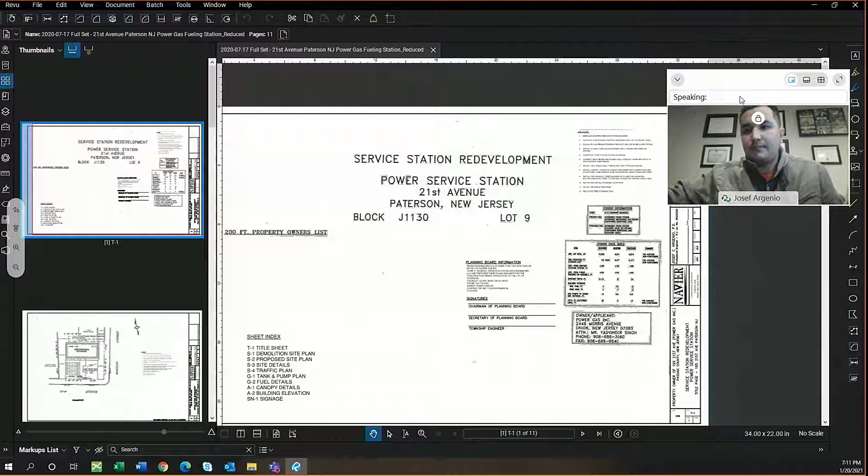Sure. This is the title page, which was talked about by the planning official, showing the zoning data tables, the owner applicant, and the planning board information, as well as a job scope, which was detailed previously by the zoning official, Mr. Michael Deutsch.

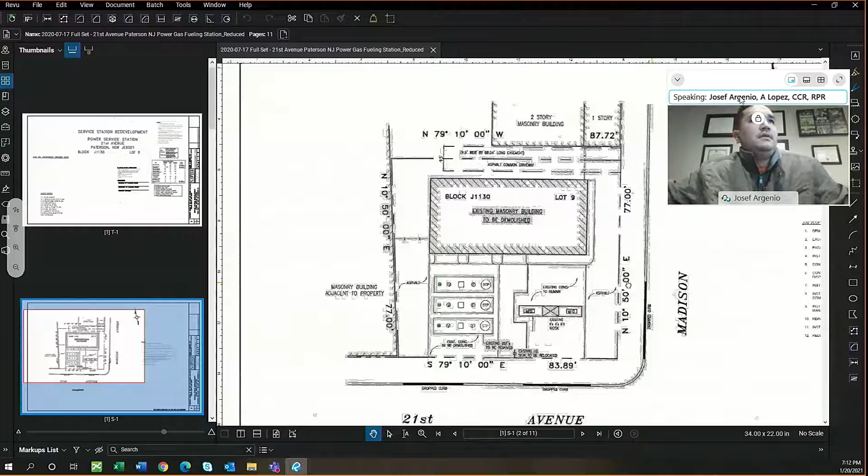This is for 195 21st Avenue in Paterson, New Jersey. The next page, S1, is an existing conditions plan, showing the existing masonry building to be demolished, along with the existing pumps, kiosk, and gasoline tanks on site. This is mainly an existing conditions plan and a demolition site plan, showing that the building, pumps, and tanks will be removed from the site.

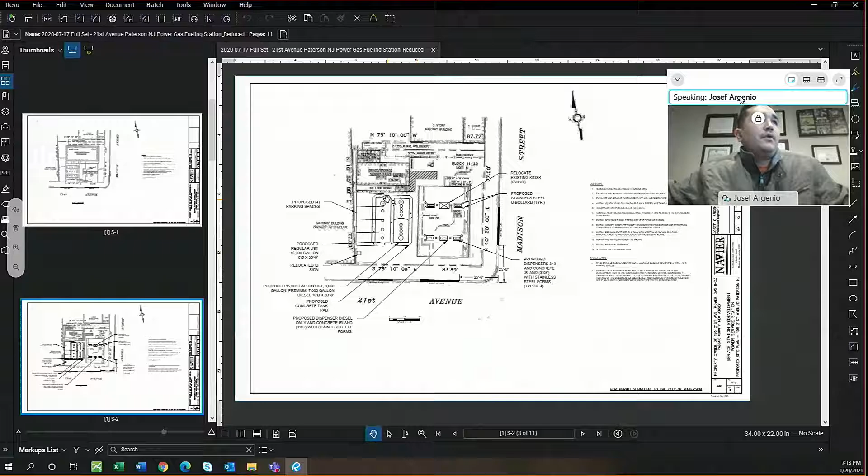The second page, S2, is the proposed site plan, which shows two new gasoline tanks: one proposed at 15,000 gallons, and the second is a split tank of 8,000 and 7,000 gallons. The proposed 15,000 gallon tank is for regular fuel, a 10-foot diameter by 30 feet in length tank. The split tank is also 15,000 gallons total, split between 8 and 7, also 10 feet in diameter, 30 feet in length, with a proposed concrete tank pad in the vicinity of where the existing tanks were located.

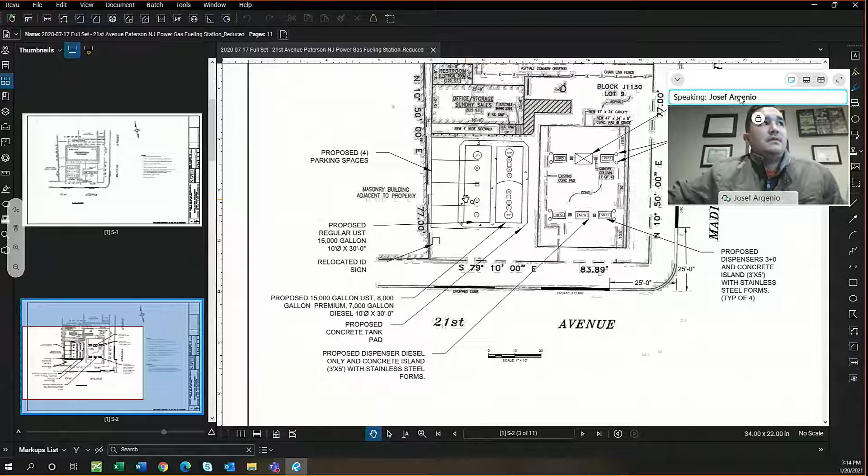I know there was some comment about the tanks being close to the adjacent property. If you look at the previous plan, the existing tanks were even closer to the property, so this change in tank location places the proposed tanks farther away from the adjacent property.

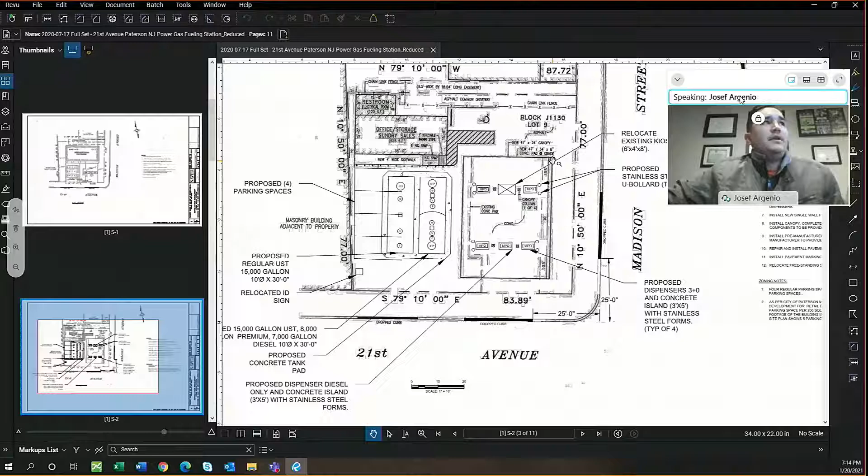This plan also shows the 5 gasoline pumps and a relocated kiosk with stainless steel U-bollards at the site. In addition, the office building and restroom, as stated previously, is shown on this site, with the new canopy being 47 feet by 34 feet. The job scope and zoning notes are also included for clarification on this plan.

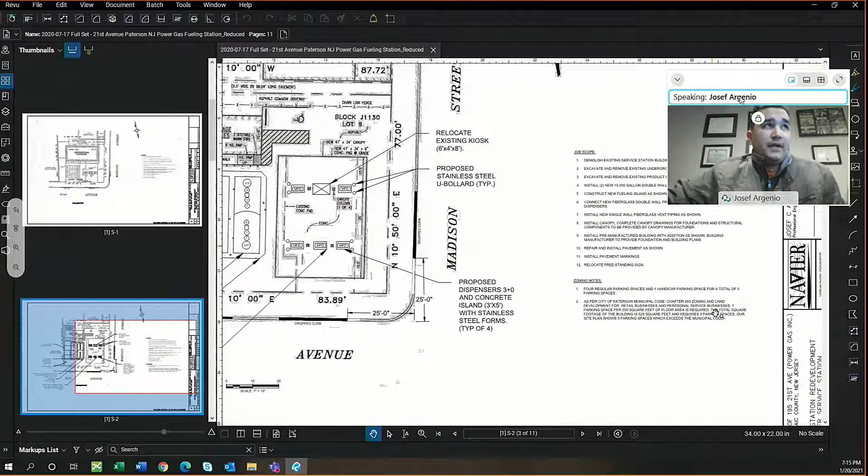The overall job scope, in brief summary, is to demolish the existing service station building, excavate and remove existing underground fuel storage tanks, as well as the product and vapor recovery piping, and install new double wall fiberglass tanks. Additionally, constructing new fuel islands and pumps, connecting those pumps to the gasoline tanks through a fiberglass double wall product line, and installing new single wall fiberglass vent piping as shown.

Additionally, I brought up the canopy site plan and location. A pre-manufactured building was shown on future plans, which I'll get to, showing the architecture of that building. Some additional minor items are to repair and install pavement markings, and the freestanding sign, which we'll also get to in the next couple pages.

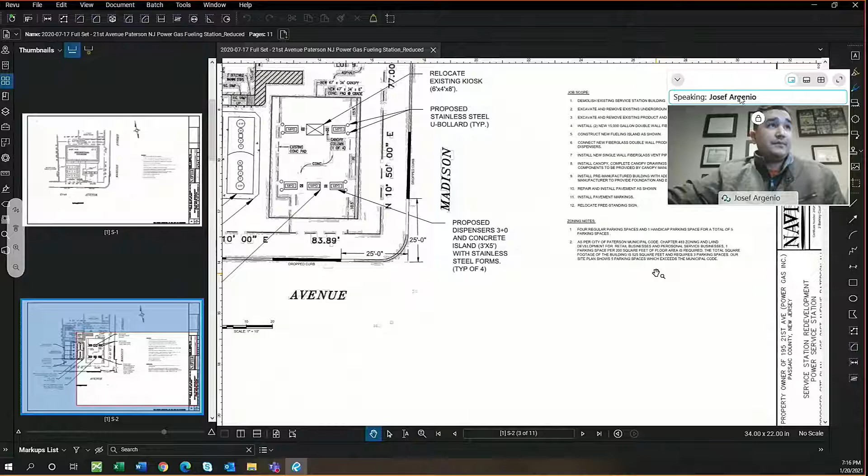The zoning notes, as referred to previously, include 4 regular parking spaces and 1 handicap parking space, and all construction is to be per building code and City of Paterson municipal code.

Moving on to the site details here.

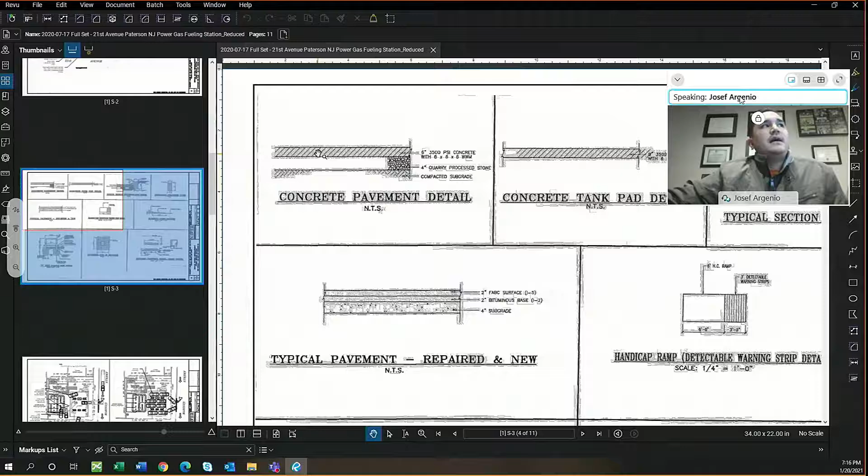There is a concrete pavement detail. The concrete pavement is going to be 5 inches thick at 3,500 PSI concrete with 6x6 wire mesh, placed on top of 4 inches of quarry processed stone and compacted subgrade. That's just the concrete pavement detail.

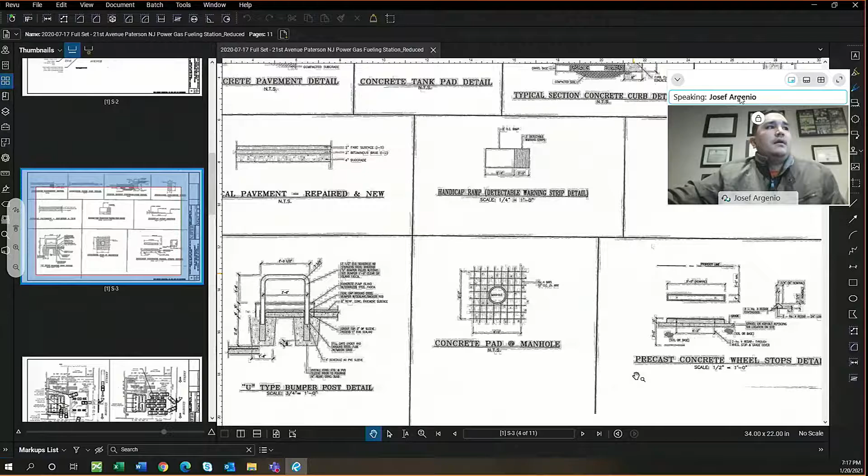There is also the concrete pad detail, showing similar thickness and strength of concrete, as well as handicap details as per ADA requirements, U-bollards, and all site-specific details for the site.

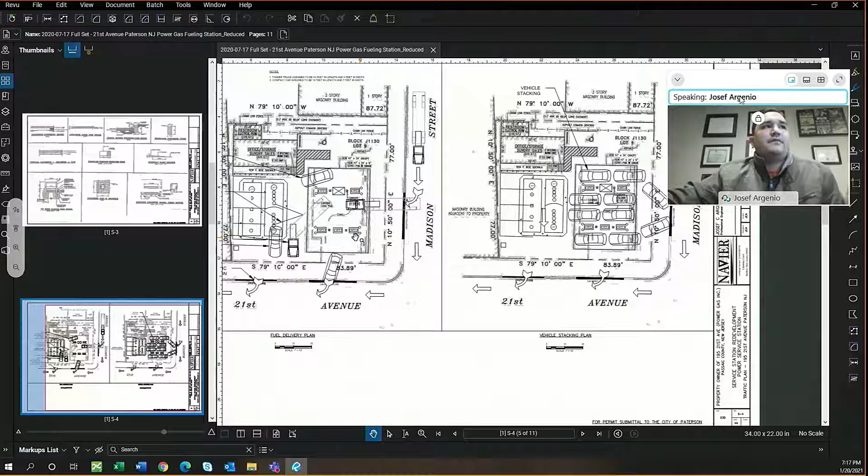The next plan is the traffic plan. I don't know if we wanted to bring in Mr. Korak for some analysis here, as he's more of a specialist in the fueling, access, and vehicle stacking. He'll be able to cover those issues for sure, so if there's any part of the site plan you'd like to defer to him, we can do that, not a problem.

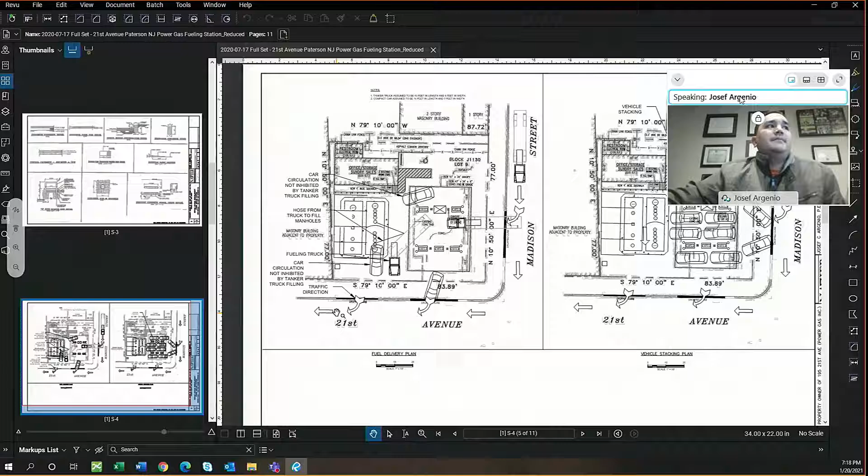As stated previously, the tanker truck is going to be coming down Madison Street and turning into the site, stopping at this location and fueling into the new tanks. This route allows traffic not to be inhibited on the site, and allows the fueling tanker truck to access the site in a good flow pattern, without inhibiting customers that are either fueling or visiting the retail store.

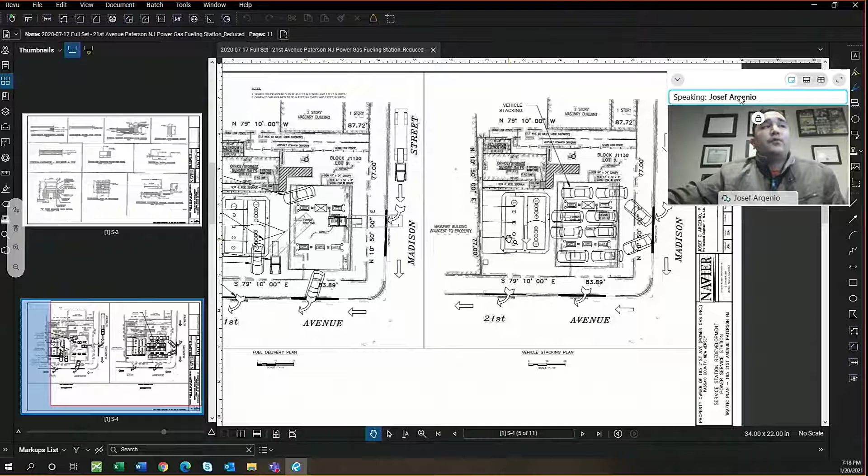The vehicle stacking shown here represents the most possible vehicles that can be stacked at the station at one time. This was generated to show the full capacity of vehicles that could be on the site.

Going into the next plan, the G1 tank and pump plan. This shows a pipe trench and dispenser connection detail, showing a cross section of the dispensers and how they are connected into the piping underground. This flexible fiberglass double wall piping is then connected into the new gasoline tanks.

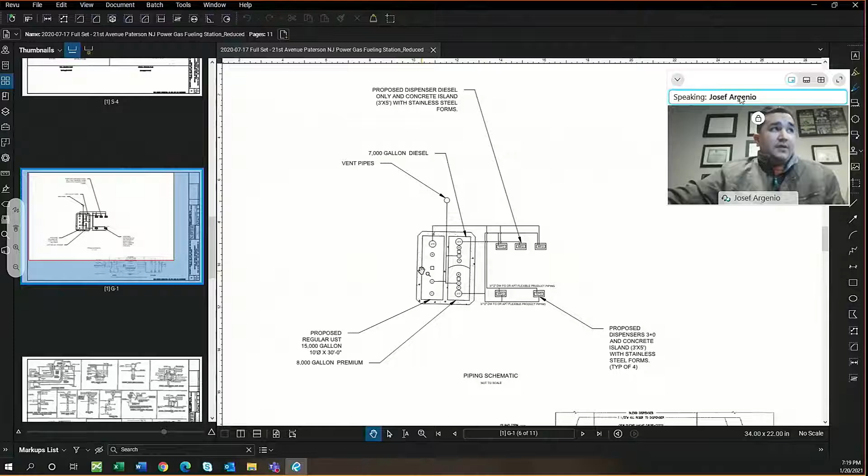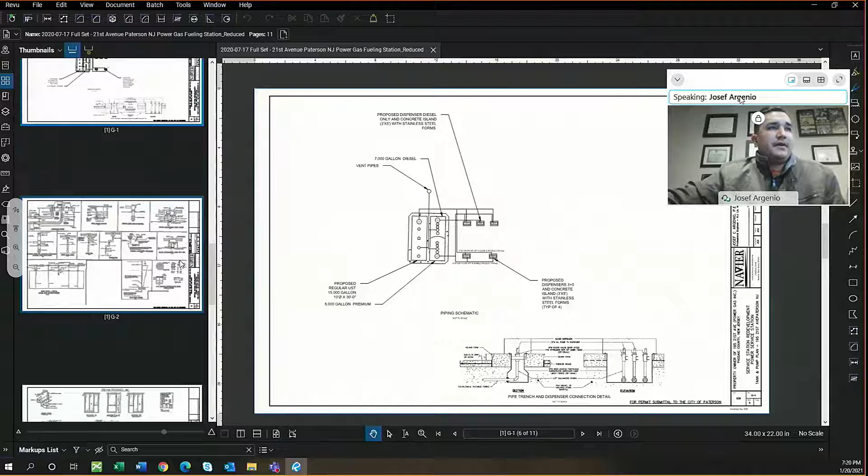This schematic is shown here and shows not only the piping from the pumps into the tank, but also the vent piping that comes out from the tanks. This vent piping is needed to alleviate pressure from the tanks, from the vapors occurring in the tanks, which is then discharged to atmosphere as per normal API standards and normal operation of a fueling station.

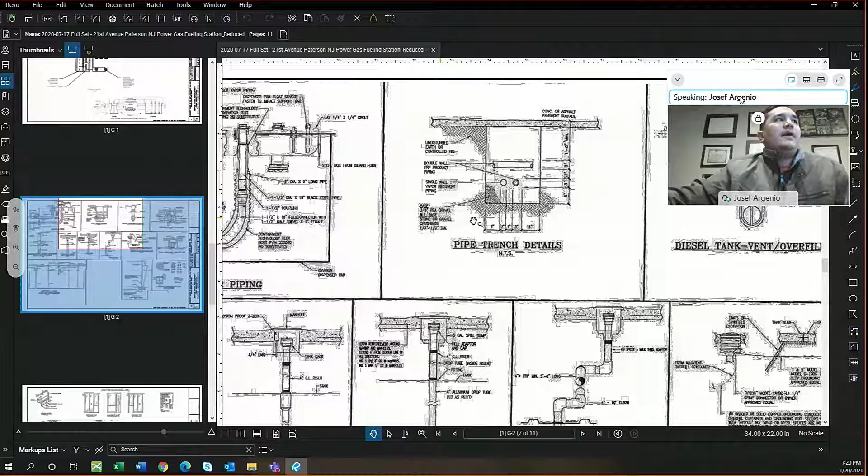The next plan shows even more specific details to the fueling operation. Not only does it show dispenser piping, there are also pipe trench details, showing the double wall product piping and the single wall vapor recovery piping in undisturbed earth, and the depths that the piping should be installed. It shows pea gravel and a stone base and gravel to be compacted for the pipe trench. There's also a containment sump.

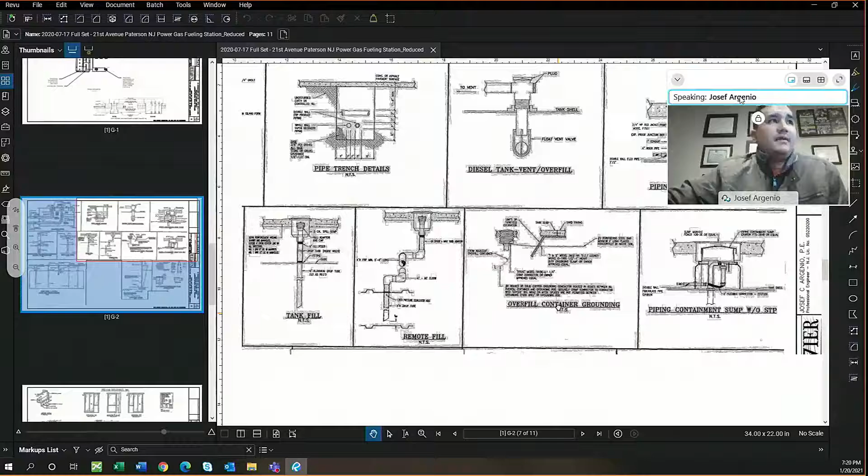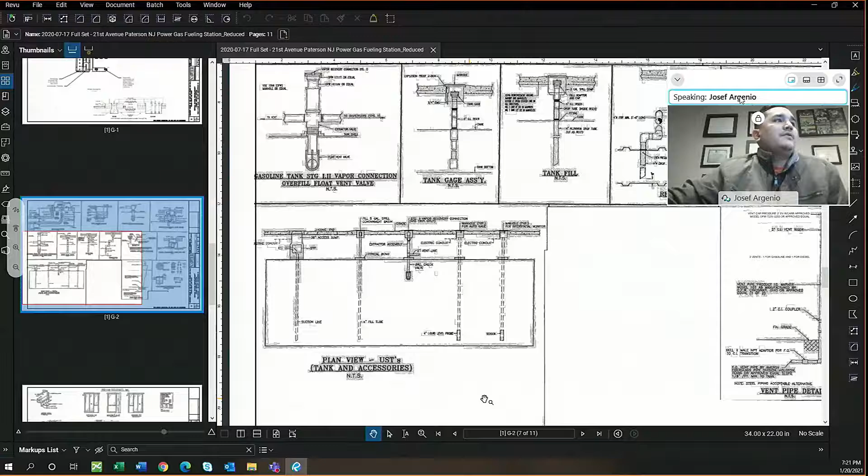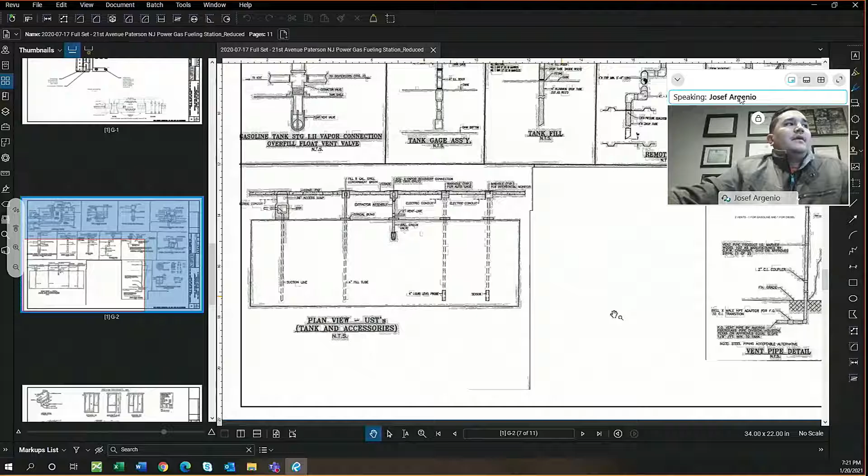This sump containment is a manhole that goes around the piping underneath the dispenser pumps as a measure to contain the fueling. Additionally, there is overfill container grounding, remote fills and tank fills, tank gauge assemblies that will monitor gasoline levels in the tank, the vapor connection, overfill float vent valve, and a view of the tanks and all the components that go into the fueling tank, such as the fill, the vapor recovery, and the manholes with liquid level probes set at a certain height in order to know the level of the tank and how much needs to be pumped out and refueled.

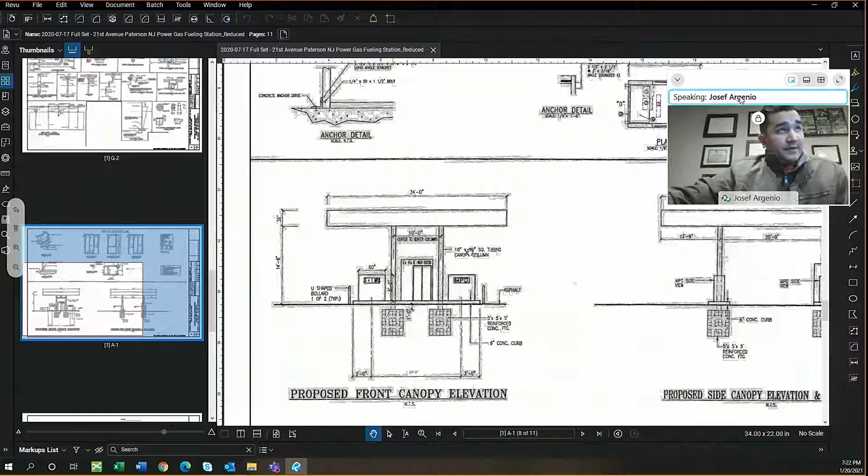The next plan, A1, shows the proposed front canopy elevation. This canopy is 14 feet 6 inches in height. It also shows the canopy being above the fuel pumps, with U-shaped bollards around the pumps to protect it from traffic. The center columns are 10 feet apart, center to center.

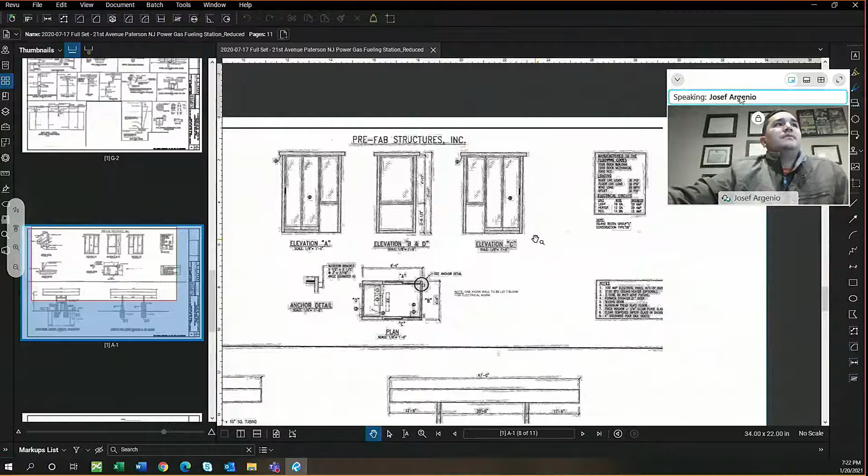There are additional canopy elevation views showing the canopy being 47 feet in length. Additional details show anchorage of the doors and elevations of the doors to be installed on the building, as well as roof live loads, floor live loads, and wind loads of the building, along with electrical circuits that will be installed for the building.

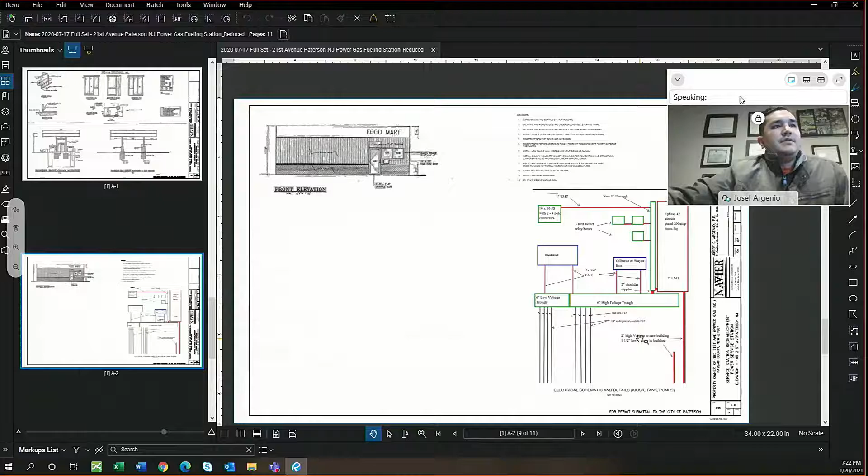The next page is A2, which shows an elevation view of the building. There is vinyl vertical siding and a brick veneer. The building is 13 feet in height, and it shows a door and 2 windows.

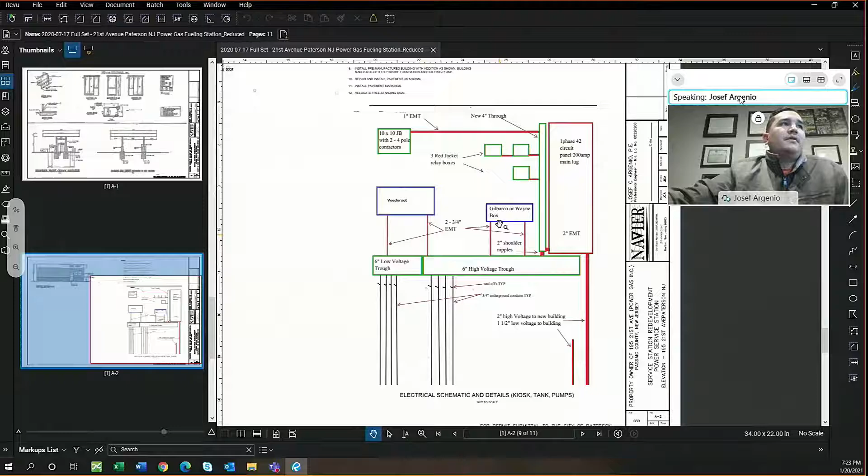This schematic here is an instrumentation schematic for electrical instrumentation for the kiosk tanks and the pumps. There is a low voltage trough and a high voltage trough, which connects electrically to the Veeder-Root, which monitors tank level in the gasoline tanks. Also connected to the trough are the Gilbarco or Wayne dispensers - those are the pumps.

The following page, A3, shows SN1, the existing ID sign detail that will be installed on the site, and it also shows the canopy elevation and the logo that will be installed on the site, as well as the ADA parking sign.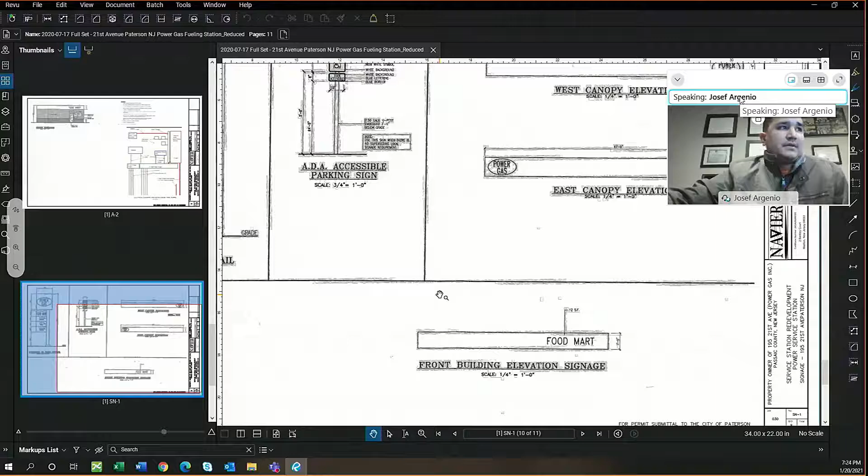The next page is the lighting plan, SN2, again showing the two different types of lights that will be installed at the site.

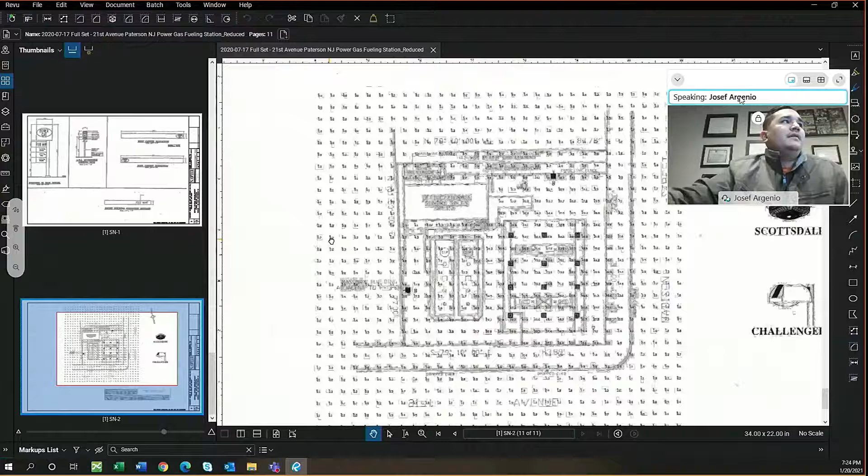These numbers here and this grid is a foot candle analysis that shows that almost all of the light will be on the site, and it dissipates as it moves away from the site. So a value of 49.2 foot candles can be shown in the middle of the site, and as it dissipates away, it's only at 0.2, 0.1 foot candles. So these lights are shown here on this grid pattern to only be focused on the site and the center of the site, and it dissipates as it leaves the site.

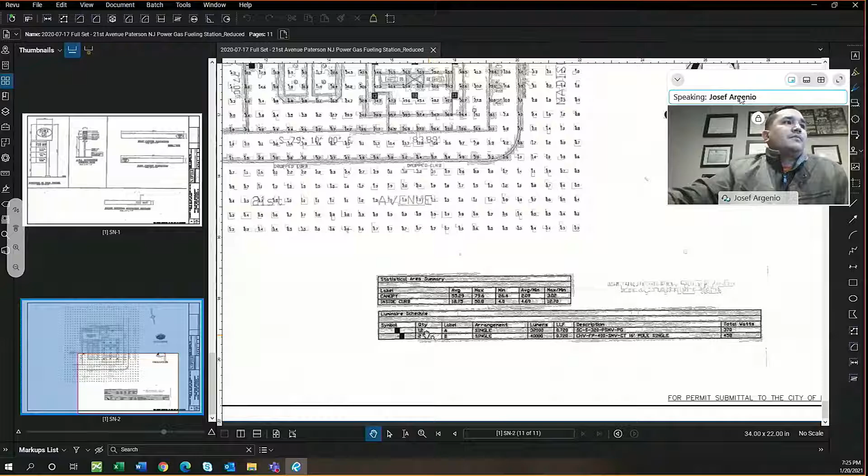And then there's an additional table here that shows this analysis and the quantity of lights that are going to be installed. So there's 12 of the Scottsdale and 2 of the Challenger.

And that concludes the plans here that I'm sharing on the screen. If there's any questions, again, just direct them to myself, Mr. Mariconda, and Mr. Korak.

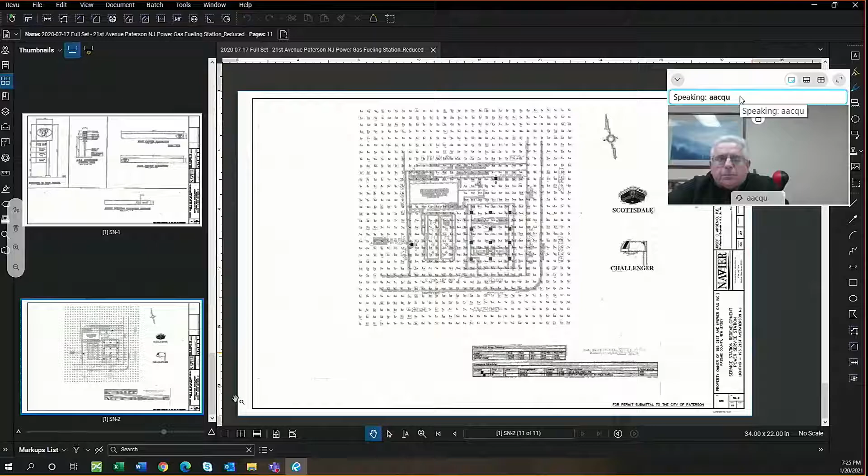Mr. Argenio, you've obviously had an opportunity to review Mr. Deutsch's report, and I know you touched on some of the issues, some will be covered by Mr. Korak. Is there anything else that you wanted to specifically reference in terms of his comments and planning review, or do you feel you've covered all the issues that pertain to your testimony?

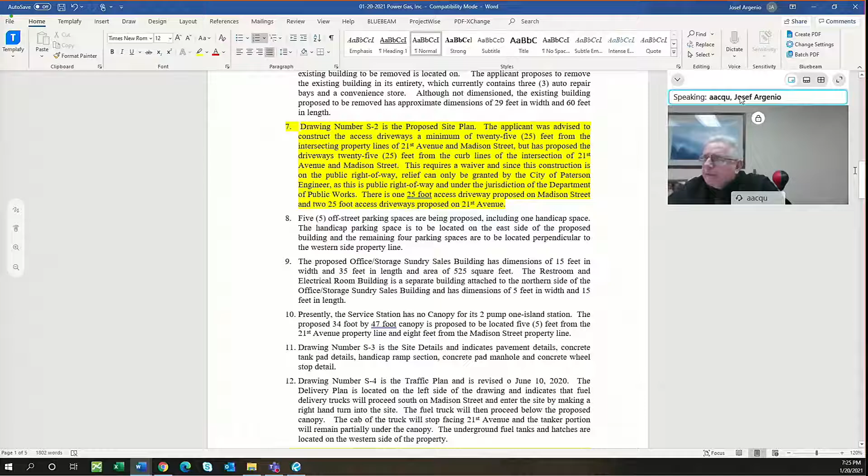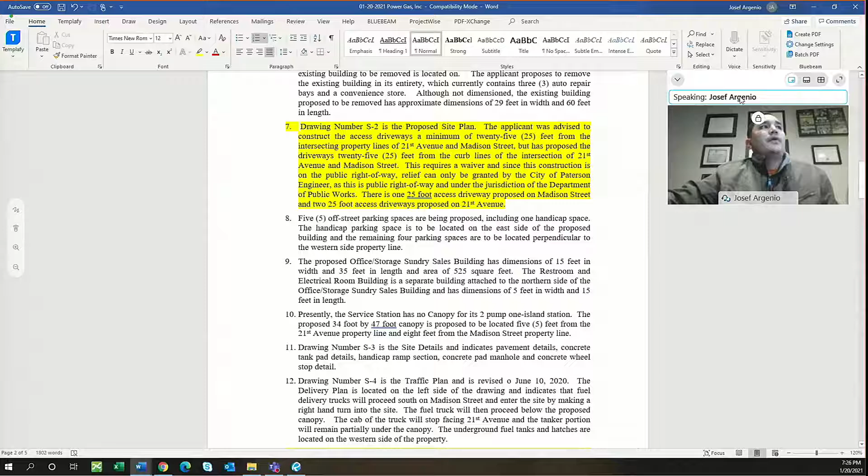One of the items I wanted to address was item number 7, where it says drawing S2 is the proposed site plan. We did show the driveway access to be 25 feet from the curb lines, and we are requiring a waiver from the City of Paterson in order to do so. I don't feel this deviates tremendously from the 25 feet from the intersecting property lines of 21st Avenue and Madison Street. That's just something I wanted to point out - there's not much of a deviation, and having those curb cuts at the locations we show allows for better traffic flow, which is why we were asking for a waiver.

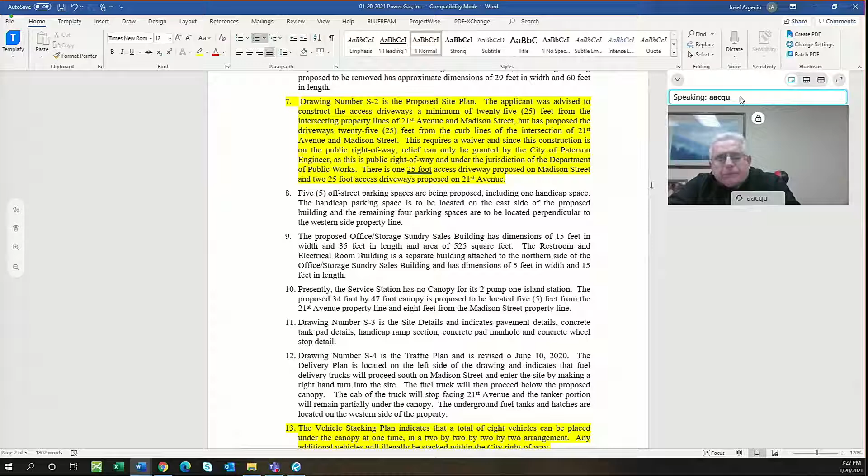Understood, and so that would be an issue the city engineer would address, perhaps at a point after approval, if you were to be granted approval. And in your estimation, is this a functional setup similar to other ones you've constructed in the past? That is correct, yes.

Anything else from Mr. Deutsch's report? How about number 24 regarding the tanks, the variance regarding tanks being closer than the minimum 35 feet to the adjacent property line?

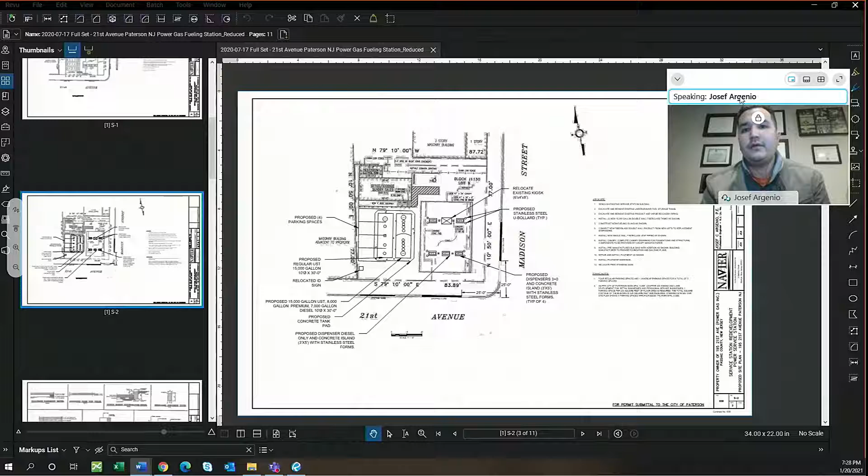Thanks, Mr. Maricondo. Yeah, I touched on that previously. The existing tanks are closer than what we were proposing. The existing tanks are almost up against the property line, so we are moving the new tanks 20 to 25 feet away from the adjacent property line. I know there is a variance being requested - in order to make the site work, we are requesting a variance. We hope it's granted and approved, and we are doing our best to adhere to those requirements. We knew those requirements, and we moved the proposed tank away from that adjacent property line.

So your diligence was that this is a substantially better location than previously existing? That is correct, yes. All right, would that conclude any other comments you would have at this time, subject to questions? Yeah, that concludes all my comments, subject to questions, yes.

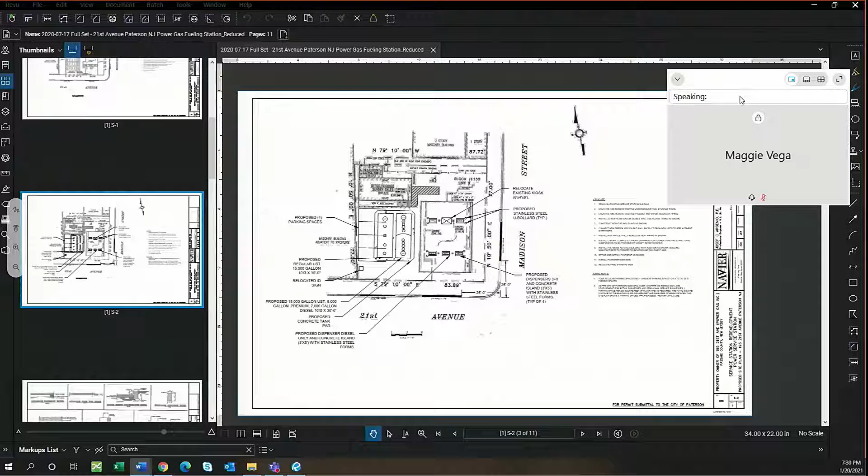Thank you, Madam Secretary. At this time, I'm going to open up to the commissioners. Commissioners, any questions of Mr. Argenio?

And on that, this is me. Traffic, but how long... is the public not going to... this is the public right of way, so I'm wondering how long the construction is going to take, because traffic over there is complicated, and I'm wondering how the public is going to have access there.

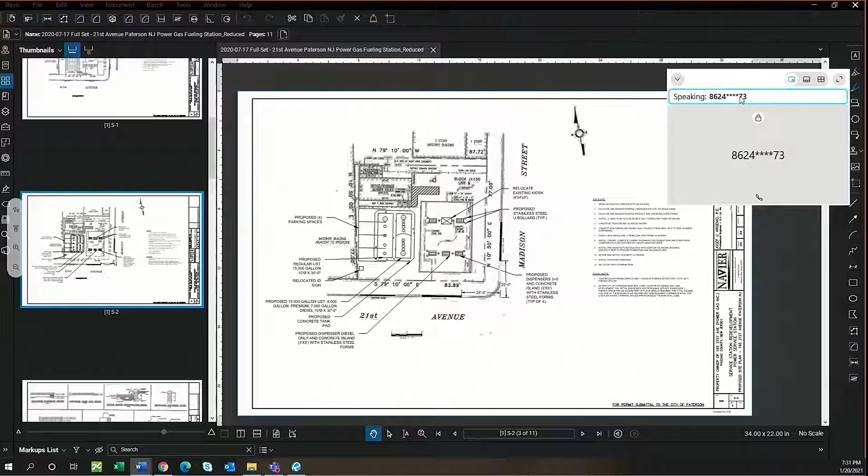Mr. Argenio, if you're able to answer that - I don't know how far you're involved yourself in the construction phase, but maybe you can give us a timeframe or a projection of how it could be done.

Sure, yeah, I think our construction contractors are also on the phone, so maybe they can add to it. But typically, if you're replacing sidewalk or a curb, it should only take one day, and that would be to jackhammer out the curb and then pour the curb, the depressed curb, at a new grade.

But what happens is that the concrete needs at least 7 days to cure before it is driven over. So at that time, the depressed curbs could not be used, and there would be cones or coverings over them for 7 days in order for the concrete to cure. But just the construction time to do a curb and pour it would only take about 1 day.

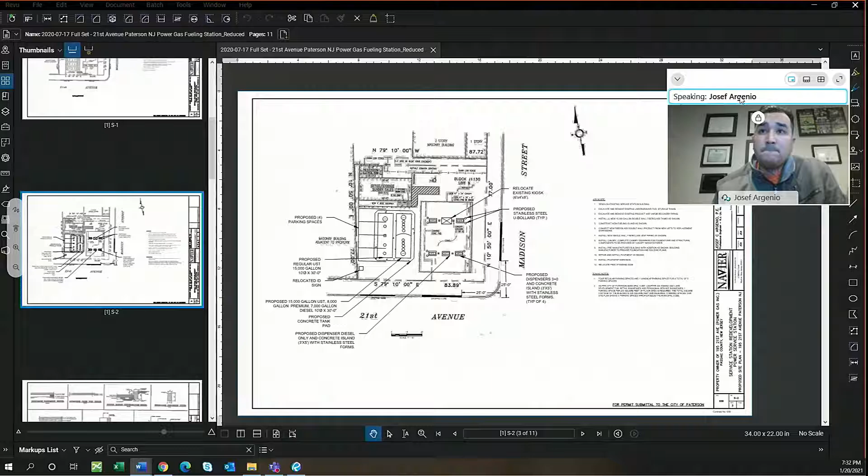And of course, there would be on-site construction as well. Correct. Commissioner Santana, anything else? No, I don't have any more questions. Thank you. Okay, all right, any other commissioners?

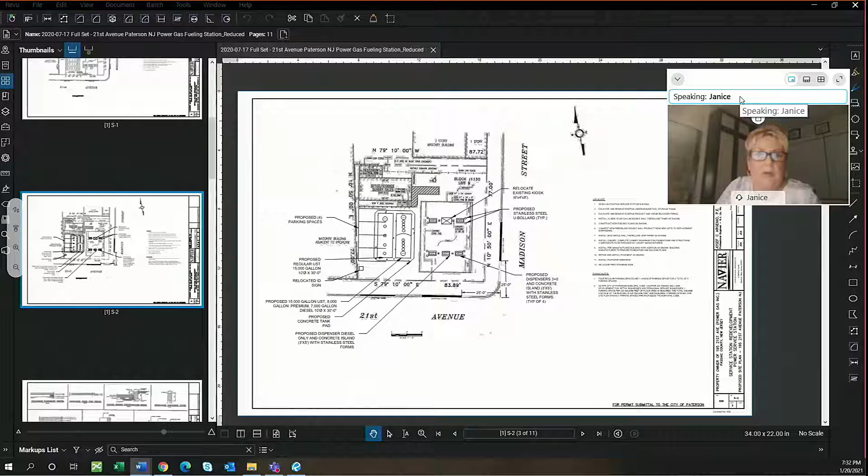Okay, hearing none. Okay, Mr. Maricondo, please call your next witness. Yes, thank you, I'll go to Ken Sherman of Stonefield Engineering.

Okay, hi, good evening. Raise your right hand. Do you swear or affirm the testimony you're about to give is the truth, the whole truth, and nothing but the truth? I do.

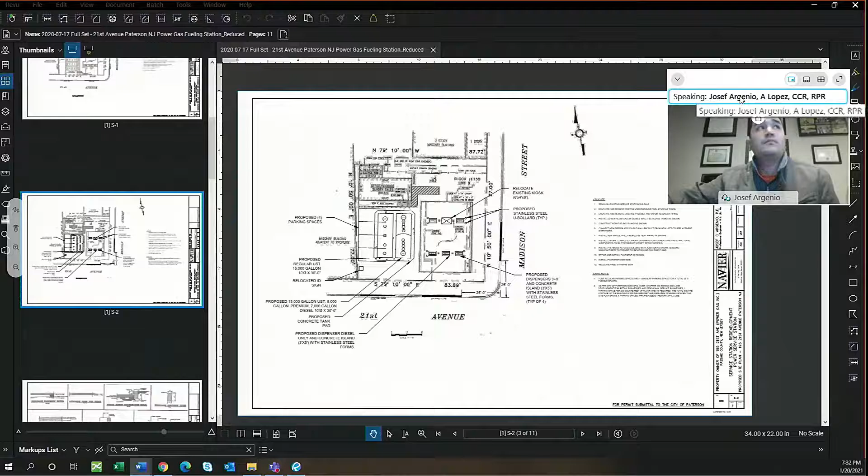Can the plans be taken down if you're not going over them? Sure, I'm sorry, yeah, we can remove those. John, do you need to refer to them at all? I think I'll share them myself from my own desktop.

Okay, I got it. So just while that's being done, for the record, state your professional background. I know you've appeared before this board numerous times. Certainly, I'm a licensed professional engineer in the state of New Jersey, with a Bachelor of Science in Civil Engineering from the College of New Jersey, expert in the field of traffic transportation engineering, having prepared over 100 traffic studies for land development applications.

That's correct. And pursuant to that review, you had an opportunity to review the site and interact with the applicant and the site engineer, is that right? That's correct. And based upon that, you did an analysis of the site as it relates to the modifications being proposed and the impact on the surrounding area in terms of flow of traffic in and out. Yes.

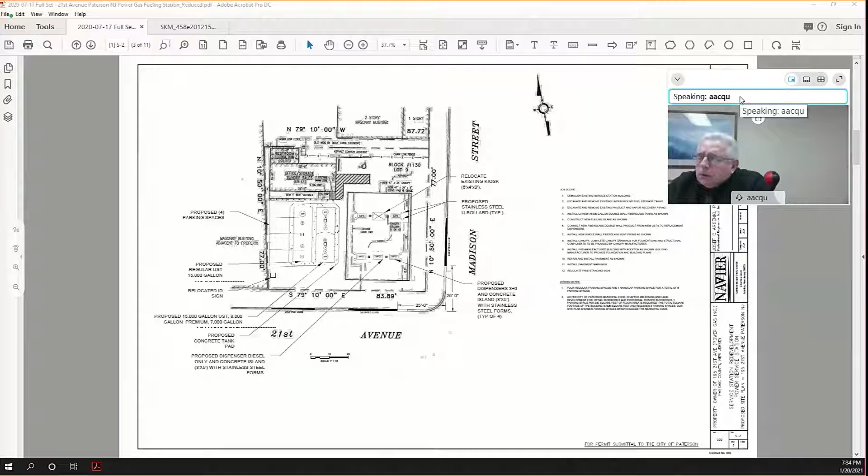Okay, could you give us the benefit of that analysis? Certainly. As part of this analysis, we first start our review by looking at the existing site, the existing conditions of the fronting roadway network, and I'll pull up sheet 2, which is the existing conditions plan of the site plan set. So the site's located at the northwest quadrant of 21st Avenue and Madison Street.

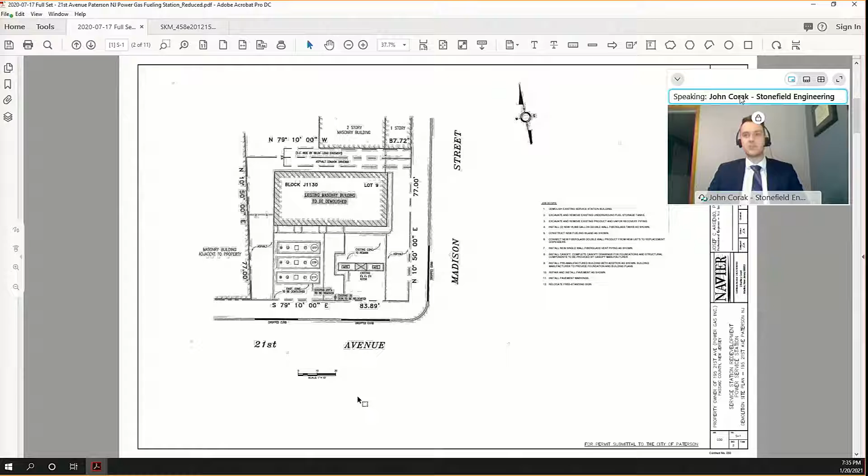21st Avenue is a well-traveled roadway in Paterson, especially in the stretch here that's between Straight Street - a name I can never say correctly - and Beckwith, where you get good two-way traffic flow that helps get traffic to and from Interstate 80. In the vicinity of the site, 21st Avenue has on-street parking on both sides of the road. There are a number of properties with driveways, turning maneuvers, and of course a number of cross streets like Madison Street where there are turning maneuvers as well.

So there's quite a bit of activity here, but it's all what I would consider to be at more city speeds. It's city driving conditions really at its heart. Madison Street is a one-way roadway headed south toward 21st Avenue, so you could turn from Madison Street onto 21st, but you can't turn from 21st onto Madison. Madison Street also provides parking along both sides, but it's important to note that in the existing condition today, there is no parking permitted along either frontage, just based on the location of the intersection and the driveways as they currently exist. It doesn't permit on-street parking along that frontage.

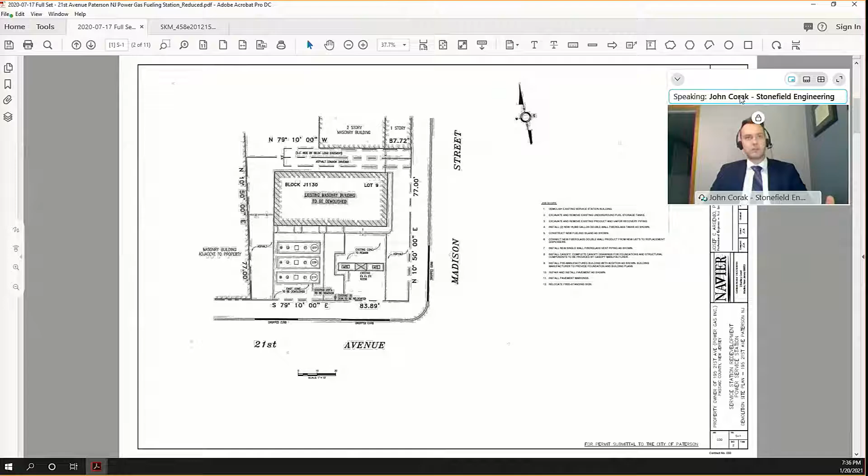The existing use itself is the service station with 3 service bays, a small convenience shop, and 2 gas pumps. That's 4 fueling positions. They can fit 1 car on either side of the pump, without a canopy. This is what I like to consider your classic city gasoline station with the service bays, the small C-store, on a corner lot of a well-traveled roadway.

In my experience doing numerous of these gas station projects, what we're seeing is that the industry's pivoting away from these service bays. One of the biggest reasons is that new cars just don't break down nearly as much as older vehicles did. This site dates back to the 1950s, and auto repairs were certainly more common back then than they are now. The breakdowns that do happen tend to be a little more complicated, and people tend to use auto dealerships instead of these gasoline service areas. For typical maintenance items—brakes, mufflers, oil changes—there are more specialty locations, like Pep Boys, Meineke, Firestone, that are used more frequently now than the classic service bay at a gasoline station.

Usually, in my experience with these types of developments where we're switching service bays into a newer use, a redevelopment of the site, we've seen a lot of service bay conversion to convenience store. That's not the case here. What we're proposing is roughly the same size convenience store as previous, at 525 square feet, but instead an expansion to the gasoline fueling canopy, as shown on page 3 of the site plan, to provide 4 pumps or 8 vehicle fueling positions for the site. What this does is, instead of generating additional traffic to the C-store use, it's simply providing additional fueling areas for gasoline use. The fuel use itself doesn't generate more traffic based on the number of pumps that are there.

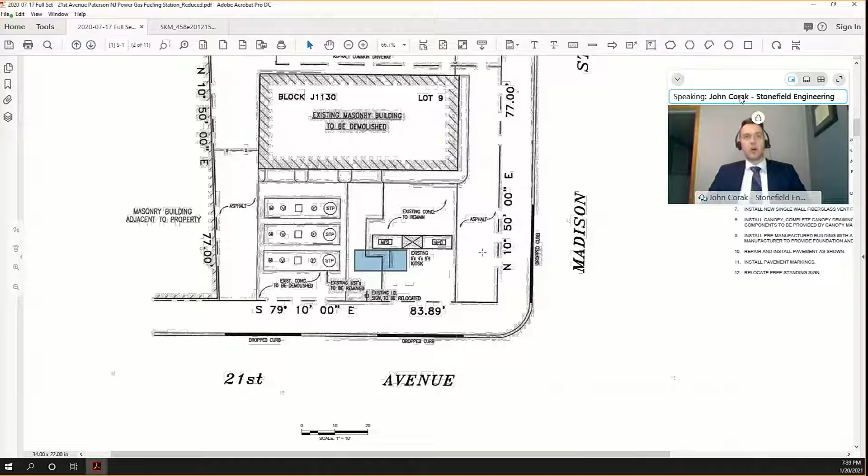It provides a vehicle who comes in off of 21st Avenue the ability to find a fueling position that aligns their car with the gas nozzle of the pump, so the vehicle doesn't need to recirculate or do a 180-degree turn on the site. Whereas in the existing condition, if you come in on 21st Avenue and there's a vehicle in that first spot, you'll usually need to turn all the way around to the other side to get to the fueling position you need. The new configuration allows for more vehicle fueling positions without an increase in traffic.

To give the board an idea of what kind of traffic we expect for the site, we conducted a trip generation analysis using the Institute of Transportation Engineers Trip Generation Manual, an industry standard for forecasting traffic from developments. There are a number of gasoline station and convenience store type uses in the manual that are ultimately related to the size of the convenience store for forecasting trip generation by the site. So really, an expansion to the fueling positions, the data suggests, isn't going to increase traffic—it's about the expansion to the C-store.

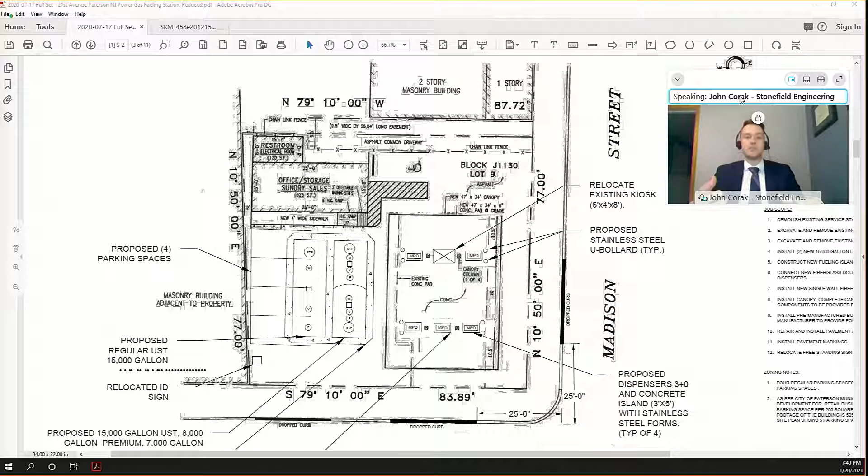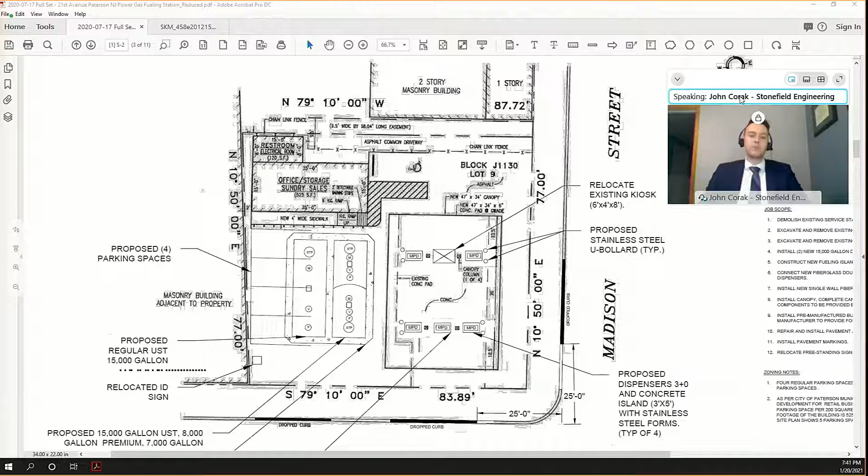The convenience store here is very small, 525 square feet. The highway convenience stores—QuickCheks, Wawa's, even some 7-Elevens—are 10 times the size of this store, so the offerings there are much more expanded than the offerings could ever be here. This is a store meant to serve the local community. It's what's desired per the redevelopment plan, not to have those big businesses, but a small community business where you can pop in quickly, get a convenience item of need—it's not a long-term destination. I know at QuickChek and Wawa's, people go there for lunch and sit in the parking lot for 45 minutes using their lunch hour away from the office. This is not that kind of use—it's a pretty quick turnover type of use.

Getting into the actual trip generation numbers, I should touch upon those, I apologize for glossing over it. Those ITE numbers suggest that over the course of a peak hour of traffic, there would be 26 trips generated by the site, in and out combined, so that's about 13 vehicles. That's a relatively low number to access this site, and that's consistent with what we've seen at other non-highway gasoline stations with a limited convenience offering.

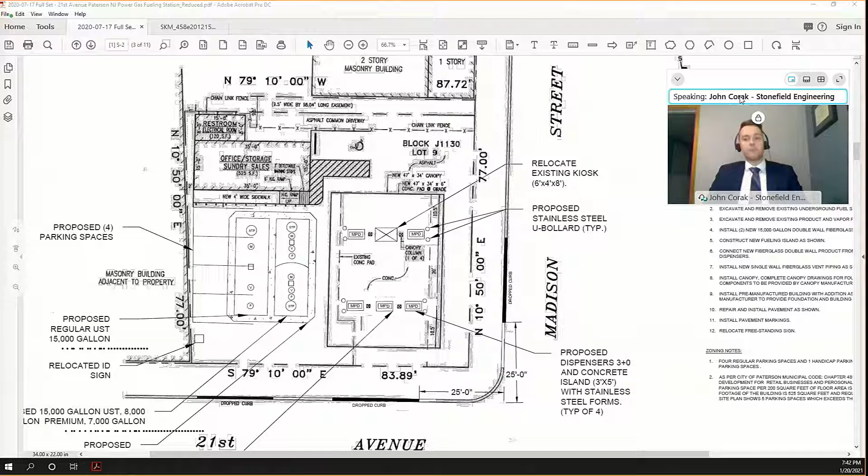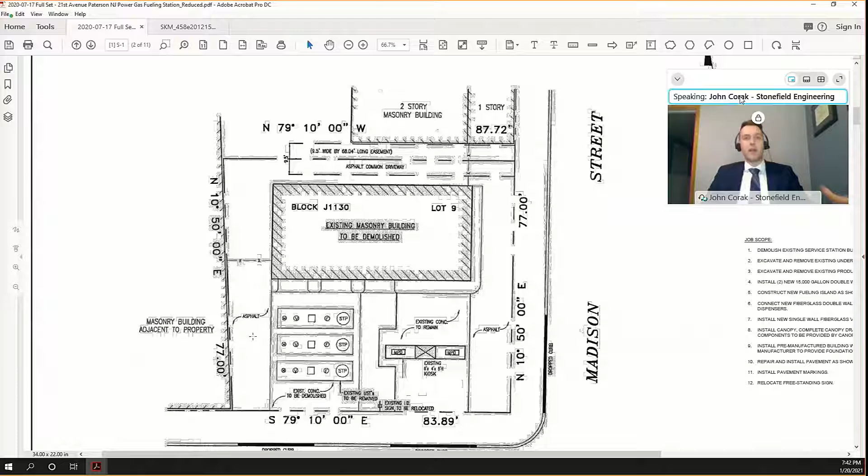Getting into the actual layout of the site, I want to make sure we compare the existing and proposed conditions. I think there's definite benefit to the interior design of the site. In the existing condition we have a large masonry structure that largely consists of the service bays, with vehicle storage along the west side of the site for that repair element, and the 2 pumps in front.

The proposed condition removes that building and instead shifts a smaller convenience store building to the northwest corner of the site. The southerly set of pumps remain in virtually the exact same position—I think it shifts by about a foot, but they're in the same location as today—and then a new set of pumps on the north part of the property are added. That can really be accomplished by reducing the total building area of the convenience store on site by removing those service bays.

It otherwise frees up a lot of space on site. Now on the west side, instead of storing vehicles for repair, we're able to use parking spaces for the convenience store, which is not something provided in the existing condition for the site.

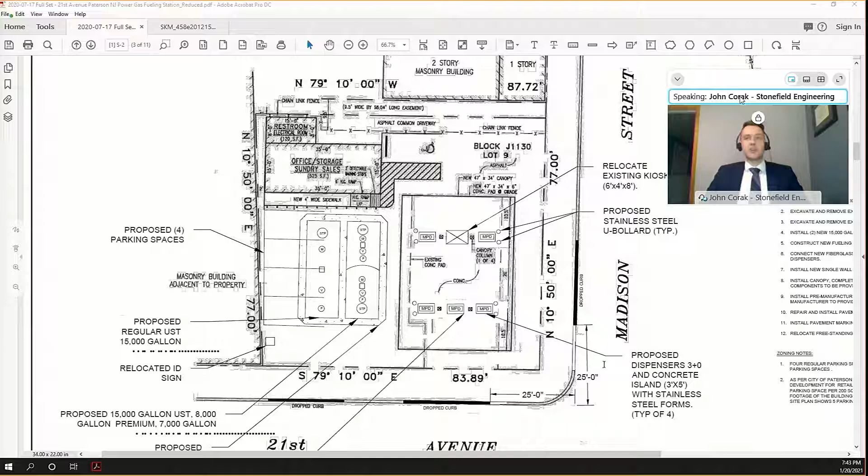One other thing to note, Mr. Deutsch made a great comment about the circulation of the plans. It was showing exclusive ingress from Madison and exclusive egress to 21st. Obviously a use like this, which is predominantly pass-by traffic, predominantly captures traffic from the road, it's going to need both ins and outs from 21st Avenue, and we would revise the plans to show those types of movements.

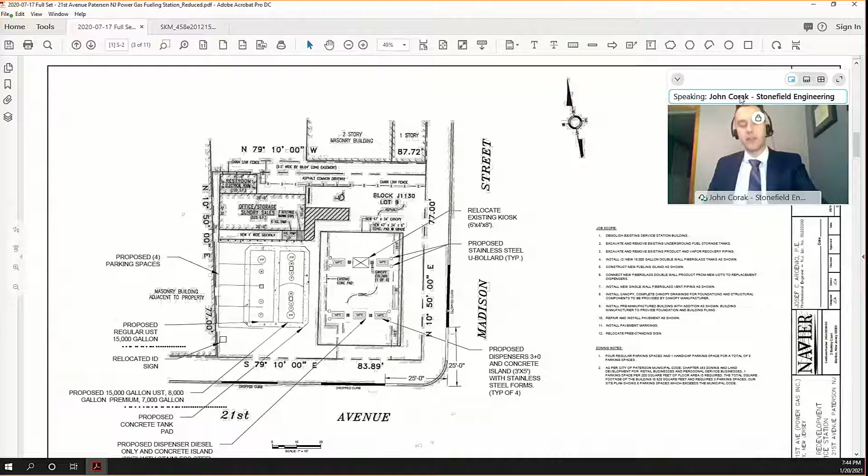The driveways themselves provide 25 feet from the curb line, and we're a little bit short on the property line, but on Madison in particular, the drop curb we're proposing lines up very well with the canopy itself, the middle of the canopy. So the turns in from Madison essentially align you toward the middle, giving you the option to go left or right depending on which pump is open and which side your fuel tank is on your car.

On 21st Avenue, we want to maintain some spacing distance between the driveway to the east for this driveway to the west. So the location here allows for good circulation with right turns coming into the site. The location of the westerly driveway allows good circulation for left turns coming into the site, and also provides great circulation for cars that came in on Madison or were at the parking spaces to leave the site effectively on 21st Avenue with a quick right turn maneuver out.

Let's see, going through, just want to make sure that I'm covering everything here. The parking was touched on a little bit in the letter.

We technically do not require a parking variance because we are in the Fifth Ward redevelopment area. However, based on ITE data, the 5 spaces for a convenience store this size is more than adequate to support the parking demand, and this is a very fast turnover type of convenience use. There's not as much offering as some of the larger highway convenience stores for patrons to possibly

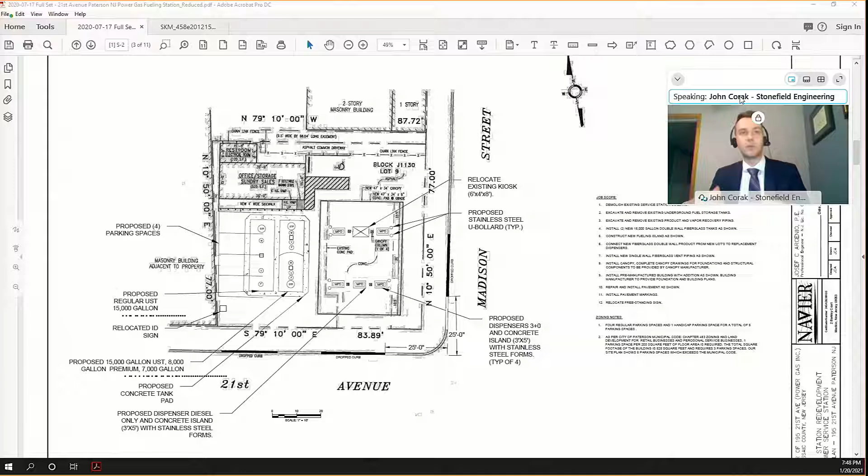The pumps themselves remain generally in the same location, which is an existing condition. We know it works. And the driveway locations themselves have been shifted slightly to improve the circulation on the site, but otherwise function safely and effectively for what I would say is a pretty low generator from the perspective of a gas station type use. It's not your highway super convenience store. It's a pretty low community gas station convenience store use for the site, and that really goes hand in hand with the zoning requirements, prohibiting those larger chain businesses in this zone.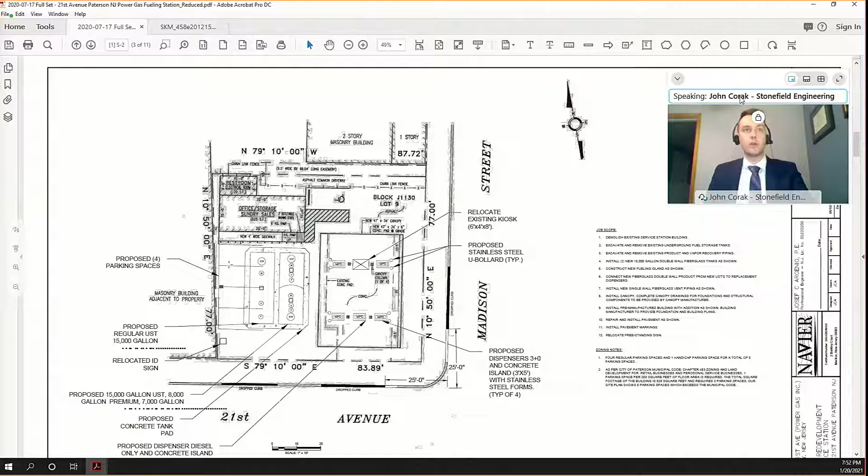When you have an ADA accessible space, you need to make sure that you do have those level grades and proper turning areas, and there's very strict standards that go with it. So I suspect that, one, with the grading for these spaces, it wouldn't be a feasible configuration, and two, trying to keep that grading consistent with the fueling, the pump location, I'm sorry, the underground fueling tanks.

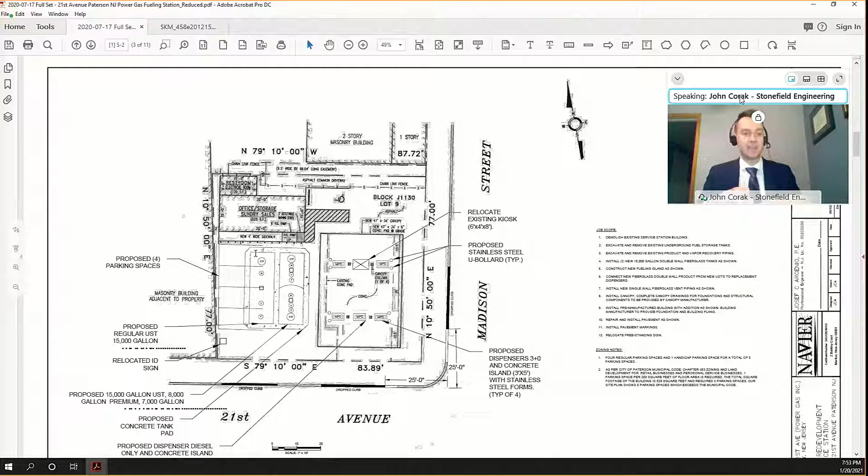There's smaller manholes, there's obstructions that make that path technically not accessible. Even though you and I might find that it's very easy or straightforward to walk across, it wouldn't meet those Americans with Disabilities Act stringent requirements for that path. So that's why the accessible space is up at the top portion of the site.

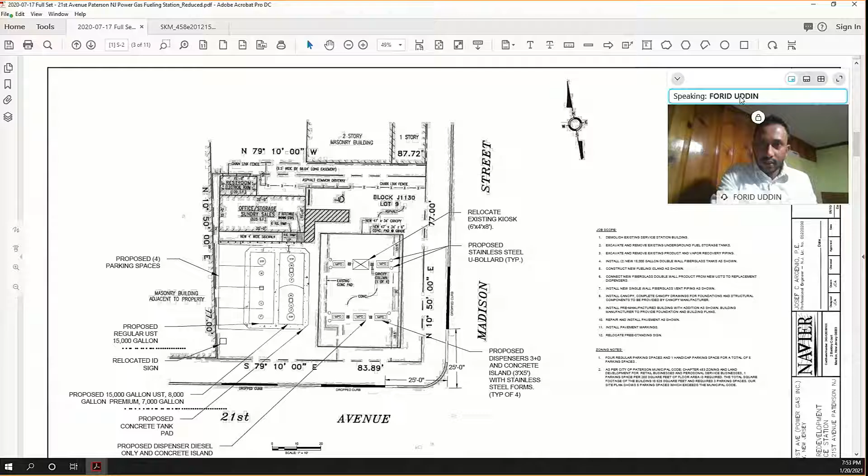So one more question, Shakar. All the 4 stations will be covered by canopies, and there would not be any more kiosks, am I correct? There's a kiosk underneath for the cashier, but yes, all vehicle fueling spaces would be underneath the canopy. All right, thank you, Madam Chair.

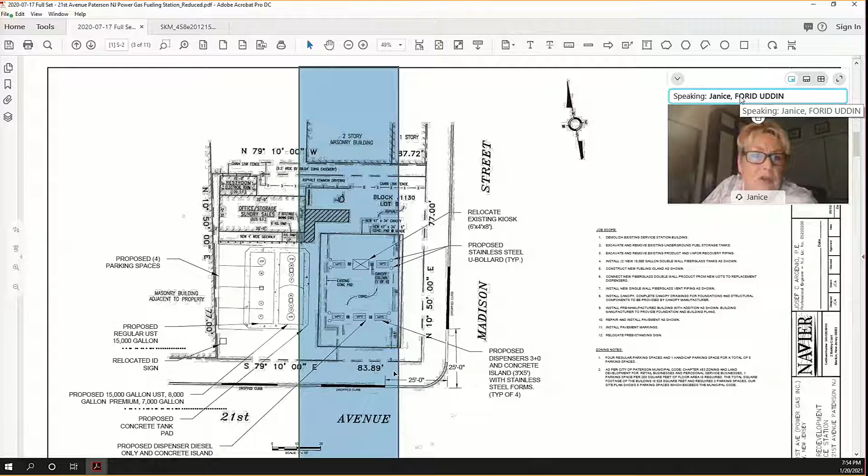Thank you, Shakar. Okay, thank you very much. Commissioners, any other commissioners? I'm sorry, is that Commissioner Cleese? No, who did I hear? No, it's not. Okay, I'm sorry. Oh, is that Commissioner Santana? Please go ahead.

I have a question. For the delivery truck, is there usually an estimated time when the delivery truck is in that area, and whether that's going to create any impact on the traffic? The question is for the fueling delivery - how long will it be on the site, basically?

I would defer that to the applicant based on his experience with this site. I know that different operators have different times and durations that these fuel drops occur, depending on how much fuel is ordered. I would have to defer that question to the applicant.

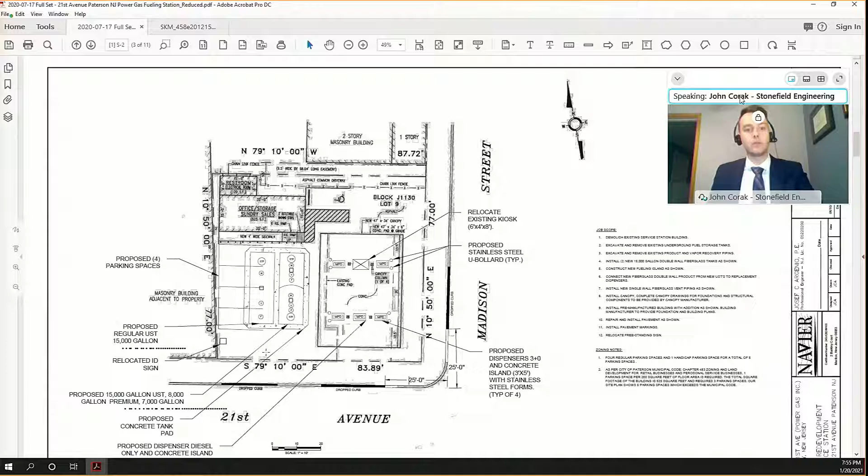Okay, so Commissioner Santana, we haven't heard yet from the applicant. He'll be next. Do you have another question, or can you save this question for the applicant himself? All right, thank you. Okay, thank you. All right, commissioners?

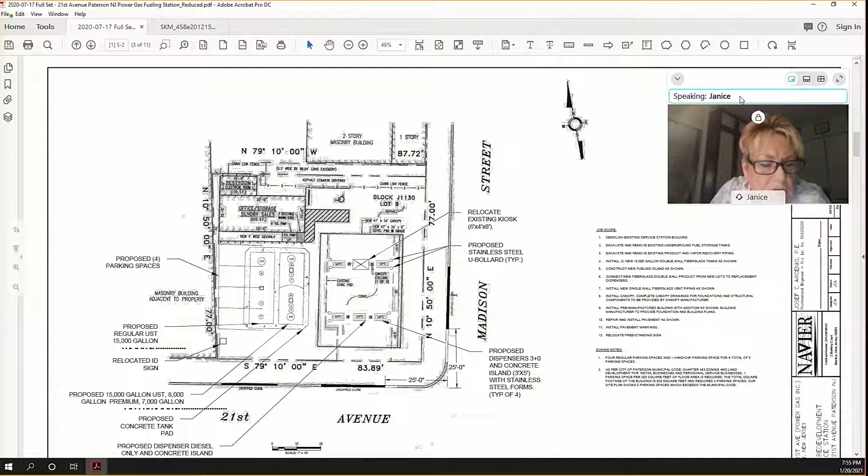Yeah, okay, I'm sorry, is that Commissioner? Who's that? Who did I hear? That was me, I said yes, Fisher. Oh, Commissioner Fisher, okay, I vaguely heard your voice. Commissioner Fisher, please go right ahead. No, I don't have a question. I thought you were asking the commissioners here. I just said yes. Oh, okay, no.

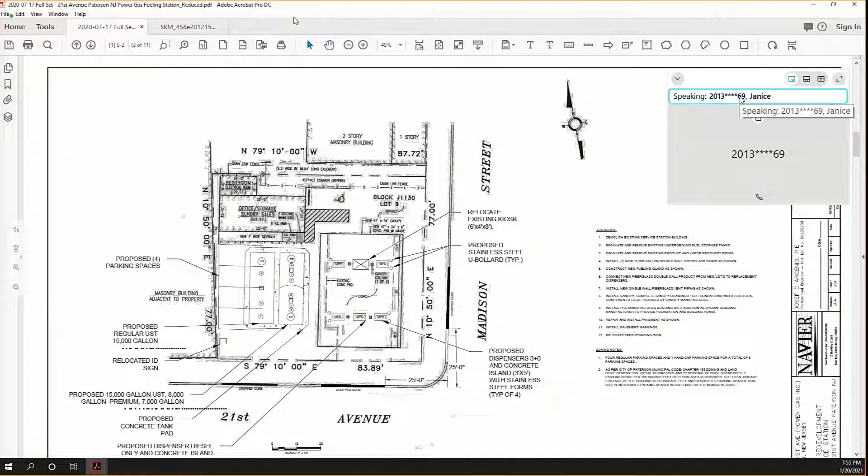All right, so then if there's no other questions of Mr. Corak, okay, then I'm going to ask Mr. Maricano to bring in your last witness, please. Sure, thank you. We'll call Mr. Singh, who's the owner-operator. Okay, thank you.

Good evening, Madam Chair and other members of the Paterson City Board. Thank you. Please hold on one second, sir, so I can swear you in. Sure, sorry about that. Please raise your right hand. Do you swear or affirm the testimony you're about to give is the truth, the whole truth, and nothing but the truth? Yes, I do.

Thank you. State your full name for the record, please, and spell it. My full name is Gurinderjeet Singh. Gurinderjit, last name Singh. Thank you, Mr. Singh. Mr. Singh, what is your position with Power Gas?

I am the president of the corporation and current owner and operator of the Power Gas station. Okay, and as such, you're fully familiar with the existing operation as well as the proposed operation, is that right? Yes, sir. And you have many years' experience in the service station business? Yes, we've been there for almost 20 years.

20 years? Yes, sir. Okay, and with respect to all the testimony we've offered on your behalf tonight, you are in full agreement with that testimony? Yes, sir. And you've heard Mr. Deutsch's report and comments and your professional responses to those questions, is that right? Yes, I did. And you're in agreement with any adjustments that have to be made or will be subject to city engineer review? Yes, I am.

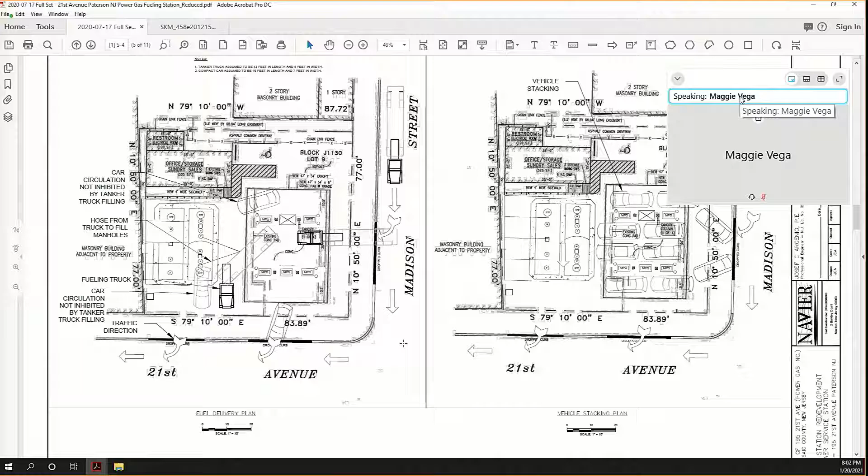Yeah, so I could pull up my screen again. I think that would be helpful. And while we're waiting to see if anybody's called in, Madam Secretary, has anybody called in? We have no callers at this time. Okay, thank you.

All right, so Mr. Corak, I think you said something about revising the plans for egress and ingress. Yeah, so it wouldn't change any of the actual engineering in the drawings. The engineers added these flow arrows for traffic direction, but I think we can all agree that having an out only to 21st Avenue significantly reduces, one, the viability of the site, but two, it's not an ideal traffic flow. You have to circulate up the street and then back down Madison in order to enter the site. It doesn't make sense from a traffic flow perspective. It doesn't work that way today. The curbs today are largely in the same location, support two-way traffic, and we would look to continue that in the future.

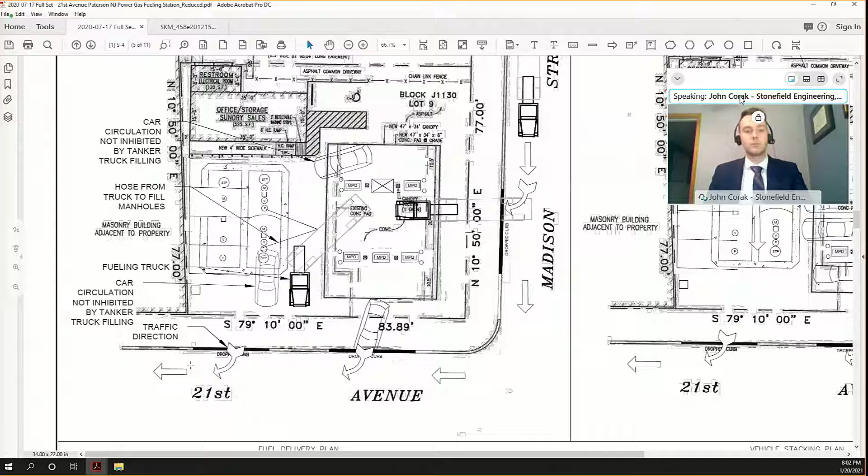Okay, understood. All right, are there no commissioners with any questions? Madam Chair, can I ask you a question too? Yes, Mr. Ford? Yes, Mr. Warren, go ahead. I believe there is no left turn on 21st Avenue from the subject property. I don't think there are any restrictions on that today. I don't recall seeing signage out there restricting that movement. It's sometimes a tough movement to make during the rush periods, but as far as a formal restriction, I do not believe there is any.

But are you going to have any sign? The picture shows just a right turn from the subject property onto Madison Street, so are you going to have that, just to make right from the subject property, or? We're not proposing to restrict the movements, no.

So what I'm asking is, you can get up from the subject property through Madison Avenue, then make a left or right - that's one option. I'm not sure if you're allowed to do that or not, but if you restrict the left turn from the subject property on 21st Avenue, it would help traffic even better, because if anyone needs to make a left, they can go through Madison Avenue.

Understood that they could do that off Madison Avenue. I think the site itself is really looking to limit the amount of 180-degree movements or turning maneuvers on the site. I can put the plan back up again to provide a little bit more visual here. I keep taking it down, I apologize.

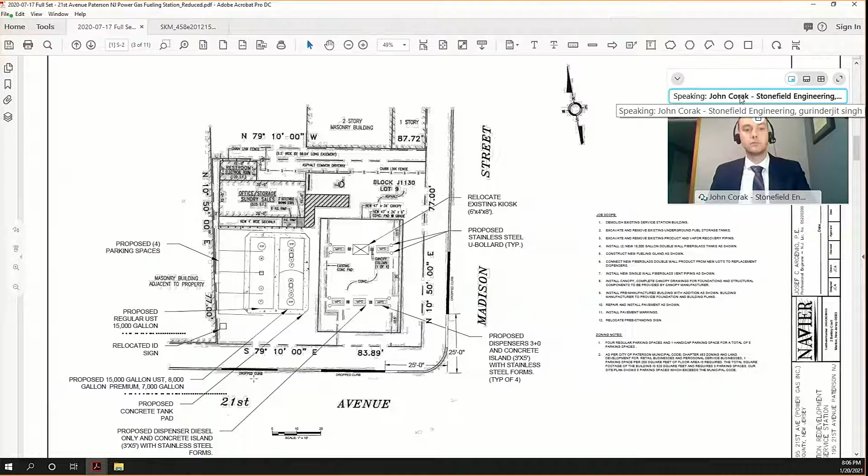I just want to interject something, because I believe this is all going to need, regardless of whether you want the egress, ingress, or the traffic flow appears better to you - I believe the city engineers have final approval. Am I correct on that? That is my understanding. Yeah, we understand that we're subject to engineering review, yes. Right, okay, just so we're all on the same page here. Okay, good. Any other questions?

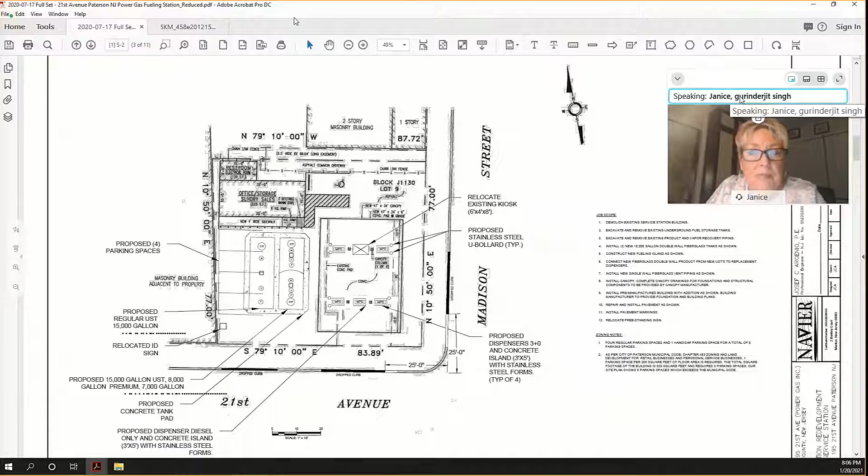No, thank you Madam Chair, thank you Mr. Park. Thank you. Okay, thank you Mr. Dean. Okay, so no other questions, commissioners? Okay, so Madam Chair? Yes, Mr. Aquaviva.

Yes, before a motion is made, I just want to put on the record that the waiver that was discussed, and that Mr. Deutsch pointed out in his report, should certainly be made a condition. Although it is in the body of Mr. Deutsch's report, it should be made a condition in the resolution that the waiver sought must be obtained from the city of Paterson, because the proposed construction is in the public right-of-way, which is under the jurisdiction of Public Works.

I just wanted to ask if my experts are all in agreement on that. John and Joe? You're muted. Madam Chair, you're muted. Sorry. So that being said, okay, Mr. Maricotti, would you like to summarize please?

Yeah, I just wanted to ask Mr. Singh one brief question to follow up, if I could. Mr. Singh, you described for us the fueling up process - how long does it take? You told me off the record it's a pretty brief process. Yes, the fuel delivery usually takes anywhere from 15 to 20 minutes. And that's a standard in the industry, is that right? Yes, it is. Okay, thank you.